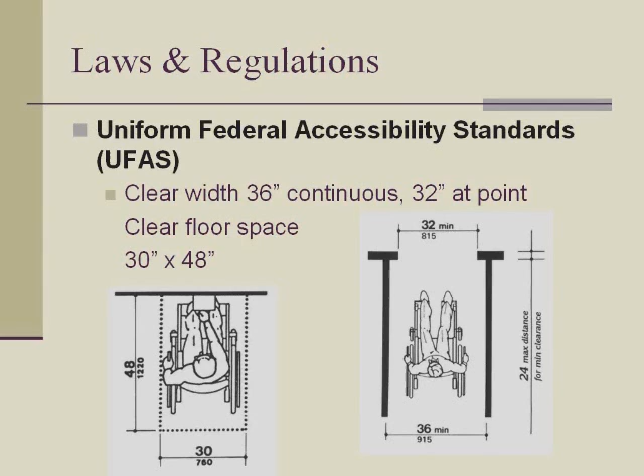So the concept is providing a minimum level of accessibility from point A to point B where somebody can navigate throughout the entire site and throughout the units. Now, in addition to the clear space for a stationary person seated in a wheelchair and that continuous path throughout the site, there is another requirement. Just like any of us can turn around at one point and start heading back, not walking backwards but facing the opposite way, the same is applicable to a person in a wheelchair. So a minimum standard has been set for this, and it's called the turning space.

Now, the T-shape is basically a method of making a turnaround, kind of like if you were going in a car and you were to try to make a three-point turn. What this allows is that you approach from one side of the T, and from, let's say, the center, you could go to either the left or the right, back up, and then turn around and head the other way.

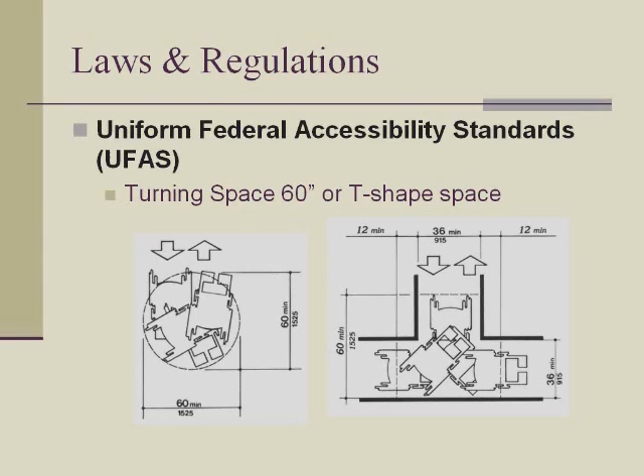Now, this is another very important one, and this is called the reach range. Think of it: if we are standing up, we can raise our hand and grab any element at different heights; we can reach any area 6 feet or something like that, just to put a number. Now if we think of somebody seated in a wheelchair, their reach ranges are reduced, and there's a different requirement for side reach and for forward reach.

So to keep in line with that, we strongly suggest that most elements that are altered or placed now should follow this guidance and be located at 48 inches. We will see this repeated in the Fair Housing Act requirements. So it is the best practice to locate elements that have to be accessible up to 48 inches above the finished floor. This applies to all accessible elements: coat hooks, shelves, storage, accessories, paper towel dispensers, soap dispensers, and all these types of features should be located within these reach ranges, ideally 48 inches maximum.

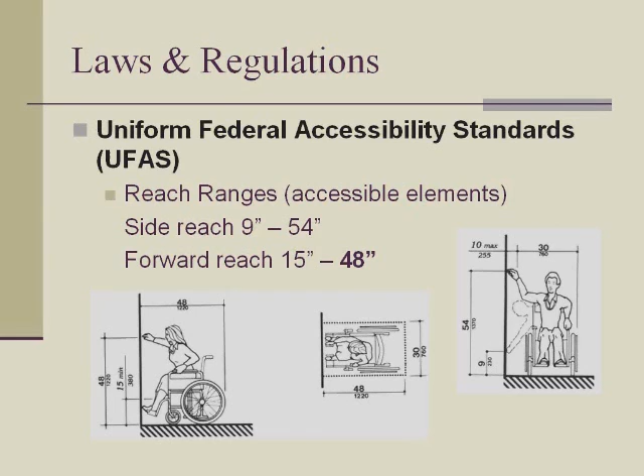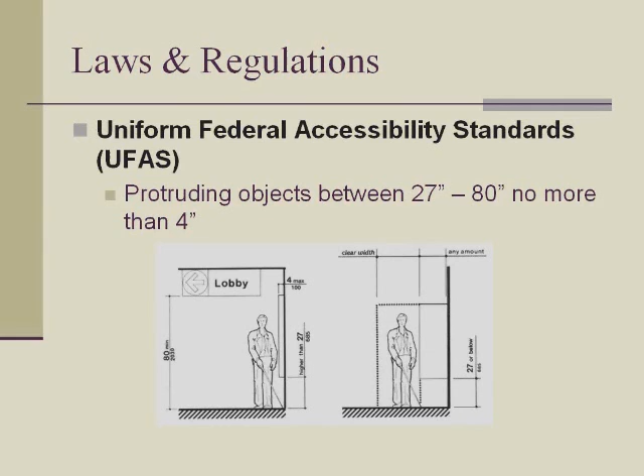So when elements are mounted between 27 inches and 80 inches above the floor, they should not protrude more than 4 inches from the wall. Otherwise, they become a protruding element that somebody can bump into and possibly get hurt. So the goal is, throughout the sites, maybe in common areas, to look for elements that protrude no more than 4 inches. If they do, there are simple ways of addressing them by placing a cane-detectable element below them, think of a planter or something that will not be moved easily, to avoid having these elements as protruding objects.

Another requirement, and this is following the line of the accessible routes, is the curb ramps. And these we'll see many times, basically provided when people have to navigate through curbs and when people need access from parking spaces into sidewalks and then to the facilities.

So the main premise here is to basically provide a slope that is no more than 1 in 12. 1 in 12 is a ratio. Basically, for every inch of rise, you need a horizontal projection or a distance of 12 inches. So in 1 foot, it will rise 1 inch. As simple as that. 2 feet will be 24 inches, 3 feet, 36 inches, and so forth.

Now, that is a maximum standard that is set. Nothing is to say that we can't design and build these elements with a lesser slope. And actually, the requirement calls for it to be the least possible slope. So many times we will see that some elements are right around the requirement, but they shouldn't be. When we have a requirement like this that is setting a maximum, we should design well below this and have these elements so that they are fully compliant.

Otherwise, if we try to design exactly at the requirement, it is likely that we can fail and the elements will be non-compliant. So it's best to try to avoid designing at that 1 in 12 slope, but try to do a softer slope, something definitely less to avoid being in non-compliance.

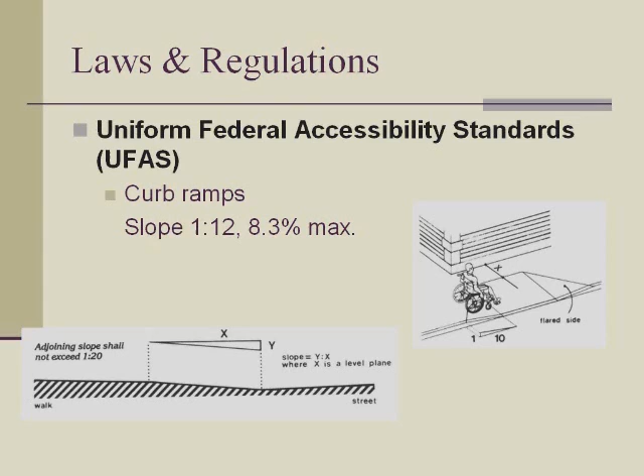And surfaces adjoining these ramps similarly should have no more than 5%. So if you think of a curb ramp for a parking space, that slope at that gutter should be no more than 5%, because otherwise the transition from that 5% to an 8.3% creates an area where a caster for a wheelchair can get trapped, and somebody can tip forward and fall off their wheelchair.

Now, continuing with accessible routes, ramps become part of accessible routes, and they have to follow the same requirements as accessible routes, basically 36 inches wide minimum, and no more than 2% cross slope. Ramps also have to follow the same requirements as the curb ramps, that they have that 1 in 12 maximum slope.

And because these ramps are sloped surfaces, there is a heightened requirement, that is to install handrails at these ramps. So for surfaces that rise over 6 inches or that are over 72 inches long, they have to have handrails. And the handrails go on both sides of the ramp, not just on one.

There are some differences, but UFAS specifically requires that the handrail height be mounted between 30 to 34 inches above the finished floor to the top of the gripping surface. We'll see that the ADAAG requirement is between 34 to 38, so that's how these requirements vary from one standard to the other. Also, the handrail diameter should be 1¼ to 1½ inches, and it has to have extensions 12 inches long at the top and at the bottom.

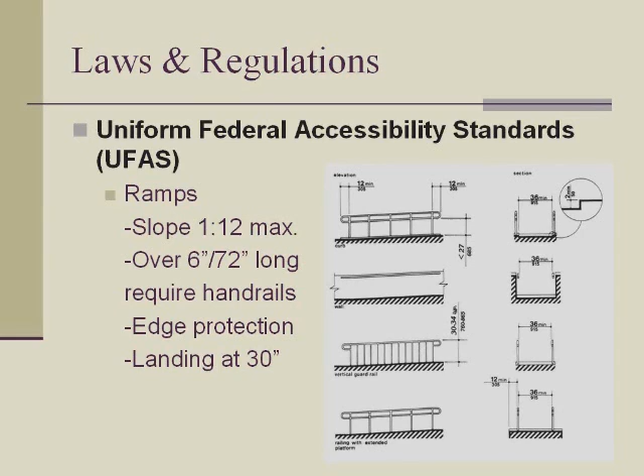Another specific requirement for ramps is that once they rise over 30 inches, they are required to have a landing, and if it is in just one direction, that landing can be as wide as the ramp leading to it. When you change directions, that landing has to have the 60-inch turnaround space that we have spoken of in the past, so somebody in a wheelchair can wheel up to that landing, make the turnaround, and wheel to the opposite direction to take the switchback. So the building blocks of that turning space start repeating themselves throughout these elements.

Okay. Another important element is doors. We'll see that the specific requirement under the UFAS for doors is that they have a 32-inch clear minimum width, and that is measured from the stop to the edge of the door. So it is a clear dimension.

So basically what happens is that many times an architect or a contractor will spec out a 32-inch door, which will not provide a 32-inch clearance because of the door jamb and the door width and all that. So basically you have to start with 34 inches or more, or 36 inches, to have that 32-inch clear minimum width.

There are specific requirements regarding the hardware. It's supposed to have lever type hardware, and also the threshold should not vary more than 1/4 inch vertical in height, and it can go up to 1/2 inch, but it has to be beveled in a 1:2 ratio. Only sliding glass doors, I believe, are allowed a little bit more, but that's not the case in most cities, and especially in Florida. Our sliding glass doors usually tend to have a higher threshold than that 1/2 inch and 3/4.

Another requirement for the doors is that they have what is called a maneuvering clearance. So we are all on the same page with the maneuvering clearance, think of this as you approach a door. When you approach a door, if you are going to open that door, and let's call this the pull side, means when you're holding that knob and you are pulling it towards you, at that point you have to get out of the way to be able to open that door.

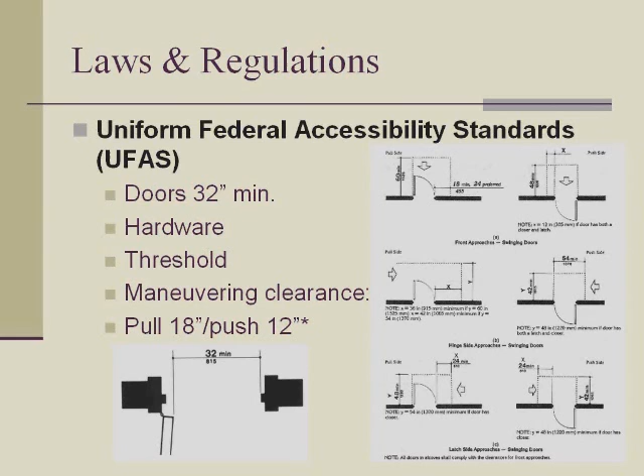Okay, now, as I mentioned before, UFAS, and the main difference from the ADA requirement is that UFAS sets specific requirements for the dwelling units, and more importantly, for bathrooms and kitchens. So we are going to look at the specific requirements for the bathrooms and for the kitchens, and also for all the common spaces and facilities serving these accessible dwelling units.

So think of it, if a unit will have a parking space for it, it has to be accessible. If it has a mailbox, it has to be accessible. The clothes drying line that's in the backyard has to be accessible. So all these features that are related to that accessible dwelling unit must in turn also be accessible. Or even if there is a common laundry area, but it is the one that is designated for an accessible dwelling unit, then it should also be accessible.

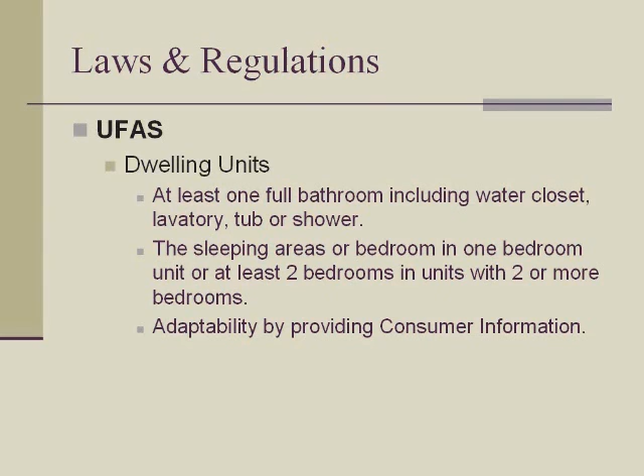And now, in the case for the Pensacola Area Housing Commission, we opted for providing fully accessible units, primarily because if you leave something that can be adaptable at a later date, there's also the possibility that the modifications might not be done right, and it might not be in compliance, and also going into providing information for the consumer. So we opted for the option of providing accessible units, which ultimately will provide just the level of access that is required at this point. Okay, so different requirements as we mentioned.

Okay, let's go into sinks. Basically, sinks should be no more than 34 inches above the finished floor to the top, and should have a knee clearance. And this knee clearance of 27 inches is another one of those building blocks that should be provided throughout for different elements. And we'll see it at the lavatories, at the sinks inside kitchens, and also at many counters; if it is required to have knee clearance, this will be another one of those building blocks with that 27-inch knee clearance.

Another element that has to be accessible in these lavatories is that if they have exposed pipes, there should be an element covering these pipes to avoid somebody either getting burned or cut by the pipes underneath the sink. So all those hot and cold water and drain pipes that are there should be covered.

At the same time, the faucets, which many times if we look at a lot of the older ones, are probably not something that is operable with one fist, these faucets should be operable, and all the operable parts should be operable with one hand. Basically, a closed fist, and should not require tight pinching, grasping, or turning of the wrist to operate.

That's the general concept behind that, to facilitate somebody utilizing these elements. Also, if there are mirrors, the mirrors should be no more than 40 inches above the finished floor to the bottom of the reflecting surface, not to the frame, but to the reflecting surface. And again, that is the maximum. So if you can design below that, by all means do so. And it gives the option of basically providing and meeting that compliance.

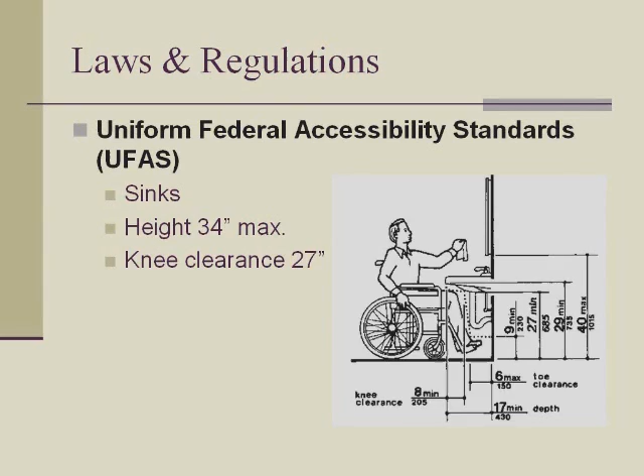Okay, another requirement, and this is one that we'll find throughout the facilities, is for the water closets. So the water closets, and this is actually a pretty tough standard to meet, should be centered at 18 inches from the wall. And the height. Here we are looking at one of the water closets that can be in the common areas. In common areas, they are allowed to go between 17 inches to 19 inches above the floor to the top of the seat.

Now, within the accessible dwelling units, these are allowed to go between 15 to 19 inches above the finished floor to the top of the seat. So there's a little bit more range for the accessible water closets in the dwelling units. And the idea behind these also is to install backing to allow the installation of grab bars, one on the back wall and one on the side wall.

The one behind the water closet should be a 36-inch long grab bar, and it's supposed to be mounted between 33 to 36 inches above the finished floor. And the one on the side wall is a 42-inch long unit, and that one should go at 12 inches from the back wall and at 54 inches minimum to the front. Now, sometimes it can get a little tricky meeting the 12 inches in the back and the 54 in the front. So the option is just installing a longer grab bar.

Installing a longer grab bar will allow that. You don't have to meet that 12 exactly. You can put it a little bit closer to the wall and go even a little bit more than the 54. And again, it helps us in meeting compliance for these water closets. These water closets require clear floor space, just like when we mentioned that a person on a stationary wheelchair requires that 30 by 48 inch.

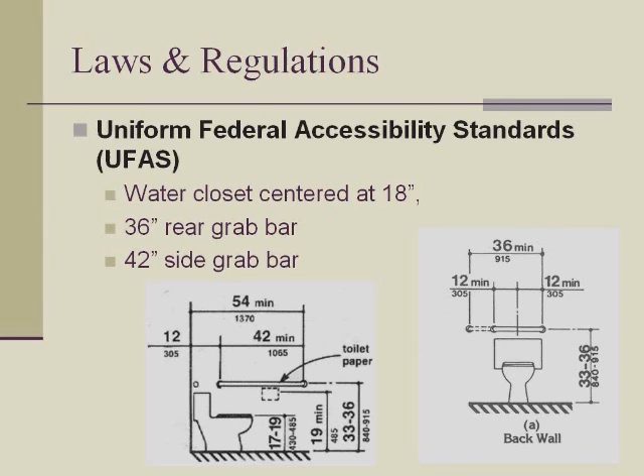So the clear floor space for water closets is usually 60 inches wide, and it depends if it is floor mounted or wall mounted. If it is wall mounted, it can be 56 inches. If it is floor mounted, it has to be 59 inches. So there are certain specific space requirements for these. Generally, in the bathrooms, by providing the 60-inch turning space, these clear floor space requirements will be met. So I'm not going to go into too much detail on those.

So just keep in mind that if you do purchase one of these seats, or right now if they're purchased and they're there, to keep them, or when purchasing new ones, that they have to withstand 250 pounds of pressure so they won't flip over and somebody won't be injured. That is basically a risk factor in there. So definitely we have to keep that in mind.

At the same time, the shower head. The shower head has to be 60 inches minimum, and basically that allows for a greater level of access for somebody that's using the shower than just having a fixed shower head. So that element always has to be there.

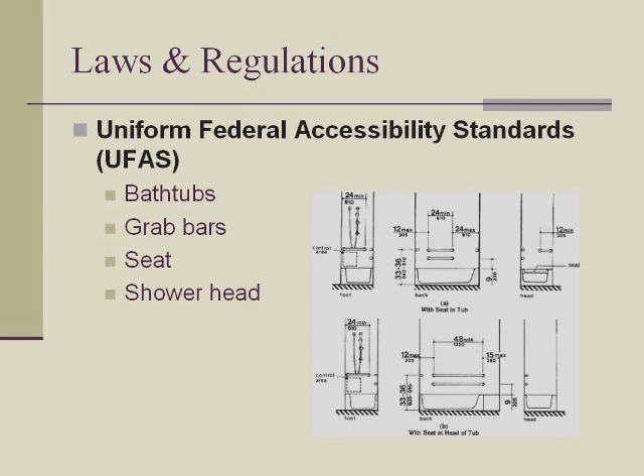So that definitely provides a greater advantage over having a bathtub. The bathtub, when there are tight configurations, does not allow that, and unless the clear floor space is provided outside of that space, it basically restricts the use.

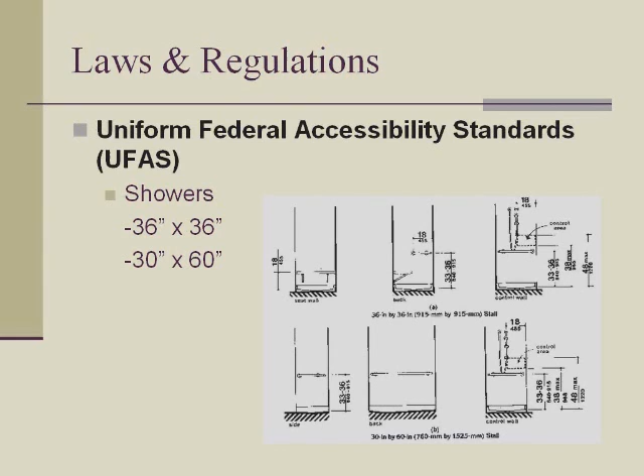And these also require at least 30 inches or 36 inches in front of them to provide the clear floor space, similar to the clear floor space for stationary wheelchairs for the water closet and for the tubs. The same applies to the roll-in shower, those same building blocks.

Okay. When we look at kitchens, what elements are we trying to identify? If we are looking at a Section 504 kitchen, what we are looking for primarily is that if it is a U-shaped kitchen, enclosed on all three sides, it must have 60-inch clear floor space between opposing cabinets, walls, and appliances. So that becomes a pretty big kitchen if you think of it. Whereas if it is a pass-through kitchen open on both sides, it only requires 40 inches between opposing cabinets, walls, and/or appliances.

The idea also is to provide the 30-inch clear floor space that we have spoken about at each one of the appliances: the washer, the dryer, the refrigerator, the range. There's also a specific requirement to provide a sink that has a 30 by 48 clear floor space below it, and that is diagram B, where it is totally clear below, allowing somebody to approach that sink in a forward manner, have the knee clearance we had spoken about in the past, and use that sink.

Now, there are specific requirements for sinks: the supporting structure for these sinks should be no more than 2 inches, and the sink should be no more than 6 inches deep, to be able to provide access. And also the height can be adjustable; basically 28, 32, and 36 are other options other than the 34, but primarily the one that is mostly utilized is the 34 inches.

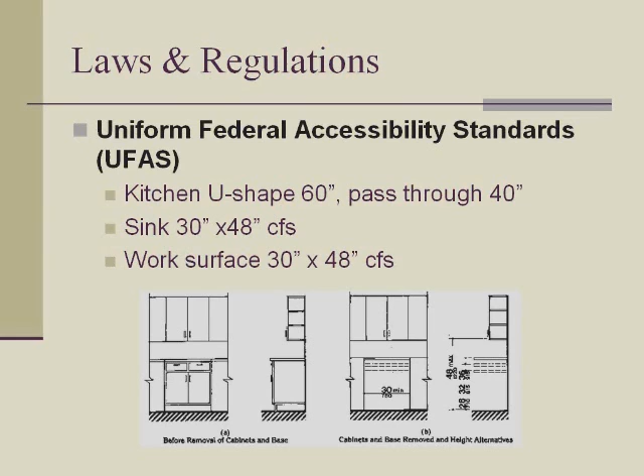Cabinets can be provided below these elements as long as they are removable, and the floor is provided throughout, and everything is finished. So basically, cabinets and walls are finished, as well as the flooring, but they would have to be removable as well, and provide instructions for the residents on how to use these elements. Okay, so that's pretty much in a nutshell the main requirements under the UFAS standard.

And now we're going to briefly address the Fair Housing Act standards. The Fair Housing Act is different from the UFAS, because it applies not only to public entities but also to private housing. Think of it like condominiums, resorts, timeshares, things like that. It applies to the ones that have over 4 units and are for first occupancy after March 13, 1991. So it's fairly newer construction than what the UFAS had.

And also, what we will see in this one is that, different from the UFAS and Section 504 that just required 5% of the housing programs, this one will cover certain units. Basically, if a building has an elevator, it will cover the units that have access to the elevators. When there are just 4 units on the lower level and no elevator, it will probably only cover those 4 units that are within the public access.

I'm not going to go too much into detail on all the requirements of the FHA, because most of the buildings that the Housing Commission has are not covered by the Fair Housing Act guidelines, but they do not have to comply with it because they were built before the effective date of the FHA.

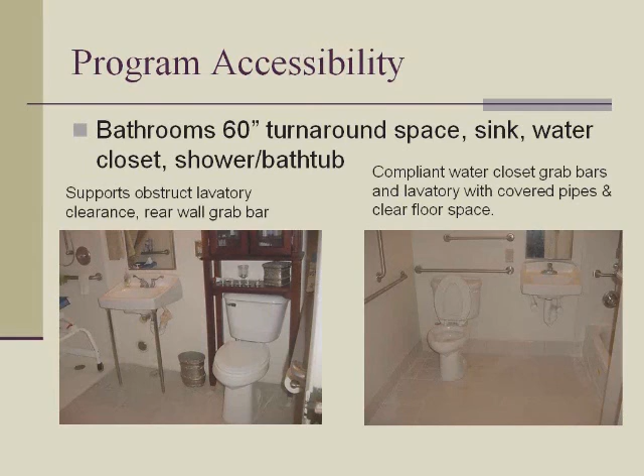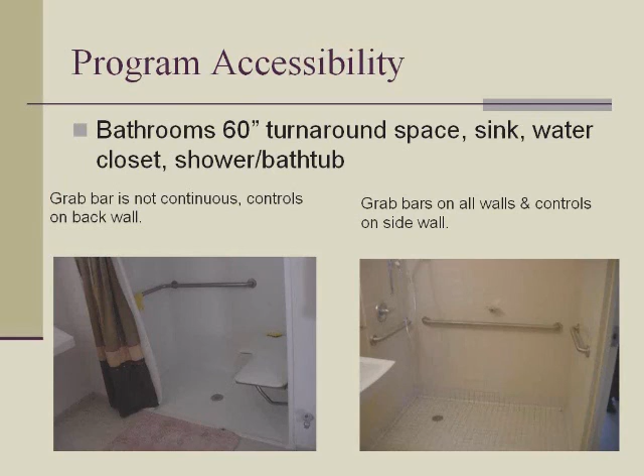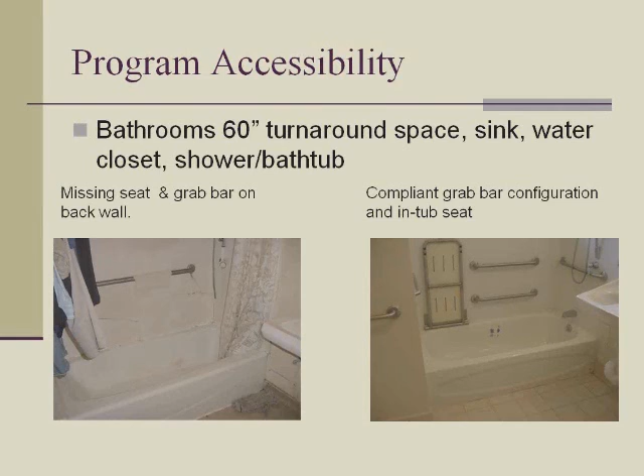So those are the type of features, the elements that you are going to be looking for. Because like I said, right now, if all these accessible units are made, they will be in compliance, but you have to think of the upkeep as well. In the future, if these grab bars are missing, you want to install them at the proper place. You want to see if those shower heads are still there, if the seat is still there, these elements to maintain those features in operable and working conditions.

The last, which we haven't addressed much, is the units that are designed for persons with vision and hearing impairments, so this is the 2%. The slides that we have looked at up to now were for the units designed for persons with mobility impairments. Now, in the units designed for persons with vision and hearing impairments, what are we looking for?

We're looking primarily for the fire alarms, that they have to provide both an audible and a visual notification, and the door notification, such as what we saw in one of the previous photos, so that somebody inside is able to see who is outside, and it is at an accessible height. Also, this can be achieved by providing the doorbell and providing a system inside that can provide both an audible and a visual notification.

But these two cannot be tied. The door and the fire alarm cannot be tied. That must be clear, because obviously that would definitely create a problem for the residents. So they have to be separate elements that must be located within the dwelling unit. And another one can be telephone notification, basically providing a system where people can connect their TTY, where these telephones, if provided, provide not only an audible but a visual appliance, so somebody inside that unit can notice these elements.

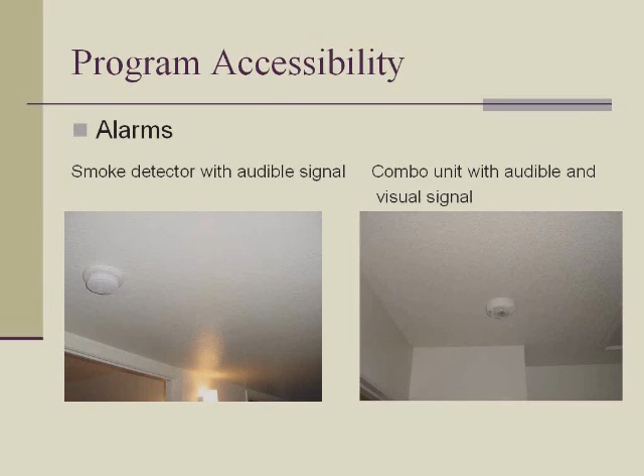So basically, to summarize the steps, number one is performing the self-evaluation, developing the transition plan, which is the phase that we are all in right now. Evaluate the programs and services, the policies and procedures, the facilities, which is primarily your area, and facilities, basically the premises, the sidewalks, the offices, the paths of travel, the dwelling units themselves.

Elements to use for these: HUD has different checklists for the facilities. There's also a DOJ toolkit for state and local governments. These elements can be used when assessing the facilities. Certainly, we are here also to assist you. Any questions that you might have, please feel free to give me a call or send me an email with any question or anything that I can help. I would gladly do so.

Also, try to reach within all this a level of public outreach, basically having access to the advocate organizations, sending them information that the transition plan is being implemented, so we can get feedback from them, if they agree, any suggestions that they might have, and as part of the outreach, if the units will be out and are available, trying to reach these advocate groups and see if they are interested in trying to qualify for one of these units.